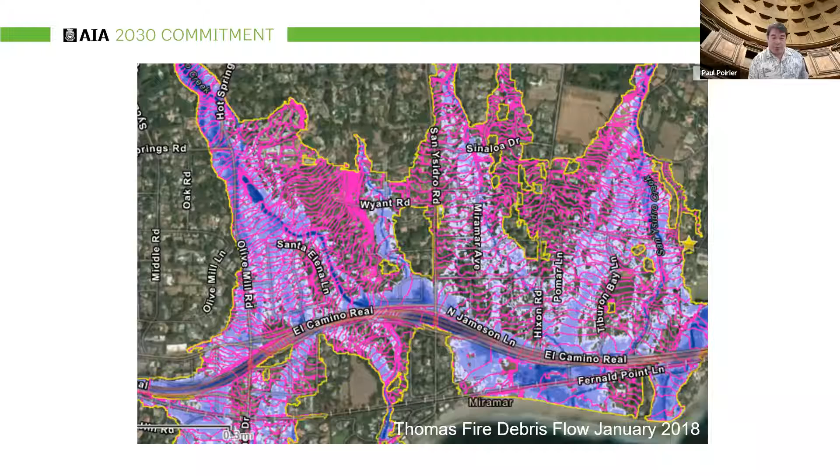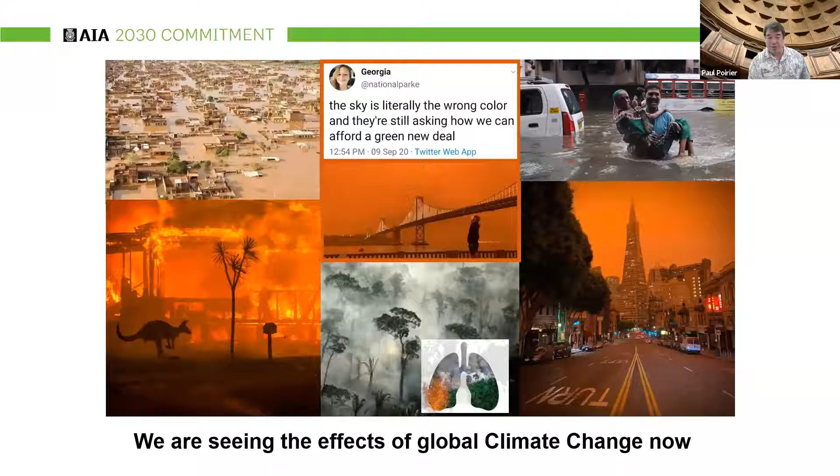All these things are not normal Santa Barbara weather. Globally, we're seeing it from fires in Australia, orange skies in San Francisco and California, flooding in India, and the Amazon as well. I'm glad to see it's not just the United States pushing this forward—through the Paris Climate Accord, a lot of different organizations are trying to work together to come up with solutions, but we need to accelerate innovation and get this stuff put in place ASAP.

Building operations are responsible for 30% of greenhouse gas emissions globally, and buildings generate 40% of annual greenhouse gas emissions, mostly in urban areas. A quarter of the emissions come from embodied carbon—the carbon emitted over the life cycle of the project, including construction and material manufacturing. That's an area the AIA is starting to look into: how much carbon goes into the materials built into the building, as well as how much carbon is generated by the ongoing operation of the building.

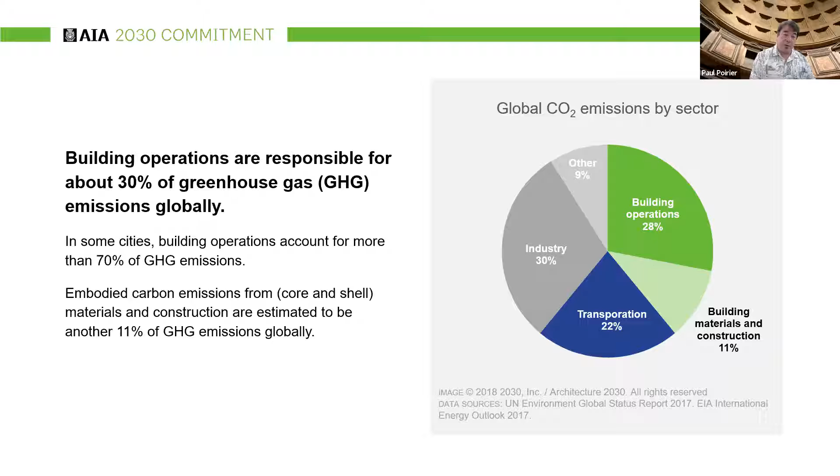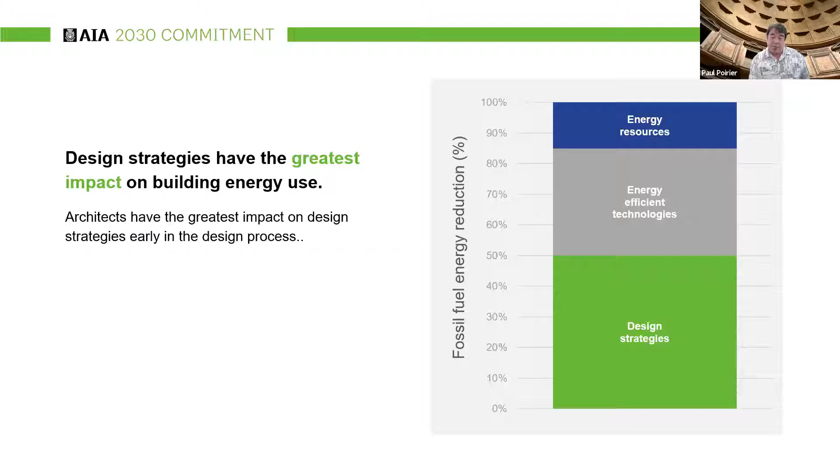Design strategies have the greatest impact on building energy use. Architects have the tools to drive down operational carbon through energy efficiency. So when we make a building that uses less energy, it'll use less energy over the course of that building's life.

The 2030 Challenge was published in 2006. In 2009, the AIA established a 2030 Commitment for firms like me to join, along with AIA COTE members. But in 2019 in Las Vegas, just two years ago, a bunch of us rebels wrote, drafted, and were signatories to a resolution brought by the membership to the convention, and the convention voted to make climate change the top priority of the AIA. Some people on the board of directors took that to heart and really started making programs to promote this on a national level, getting staff and money behind it to push this forward. It's really, really incredible that that has happened.

There are a lot of statistics about climate change. Again, the fight against climate change will play out in our cities and our buildings as we double the current global building stock. Clearly, new buildings need to be built with the type of infrastructure we want for the future, not the type we've been using up till now that may not be the most effective or efficient for fighting climate change.

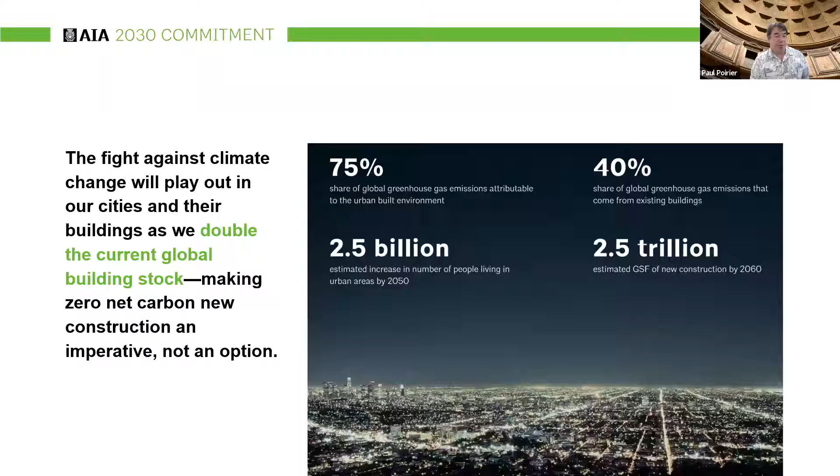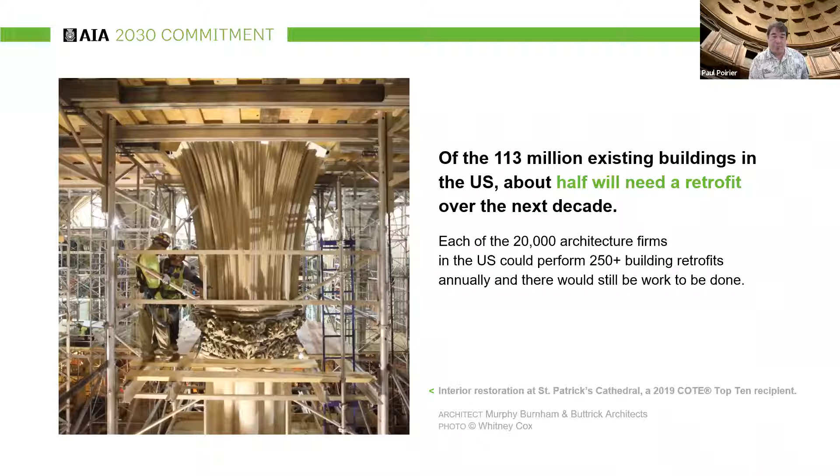Half the building stock will be retrofitted, so retrofits are important. Nobody's really legislating much about the retrofit of existing buildings at this point, but clearly as we're working on buildings, we want to start doing what we can to change them to be way more efficient with lighting technology, HVAC technology, solar technology. All those things are at our fingertips here in California to really make our buildings high performance without much effort.

I won't read the whole quote from Hop Hopkins, the director of strategic partnerships at the Sierra Club, but he says: you can't have climate change without sacrifice zones, you can't have sacrifice zones without disposable people, and you can't have disposable people without racism. Meaning, if we just focus on climate change in wealthy neighborhoods or big, expensive, fancy zero net energy homes, and we don't work on energy efficiency for low-income housing, we're really not going to get where we want to be—we'll be perpetuating the social justice aspect of architecture in terms of healthy places for all income levels, which is what the new goal is. The AIA is embracing that and trying to figure out how to put a metric on it and include it in their design perspectives to show people how it can be accomplished.

So this next section, we're going to talk about what the heck is the 2030 Commitment and what's the process of becoming a signatory.

The mission of the commitment is to transform the practice of architecture in a way that's holistic, firm-wide, project-based, and data-driven. It started in 2010, shooting for a goal of 60% energy reduction from the average energy use. Now it's 2021, so as we're ramping up to 2030, we're trying to meet 80% reduction in carbon use from the national average.

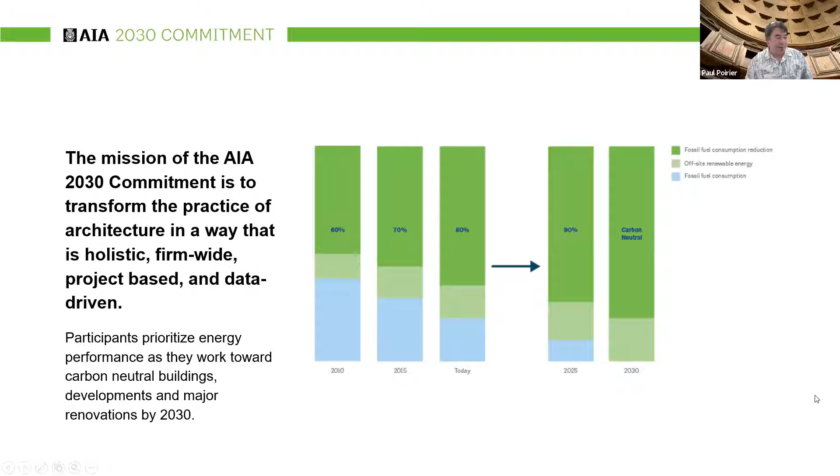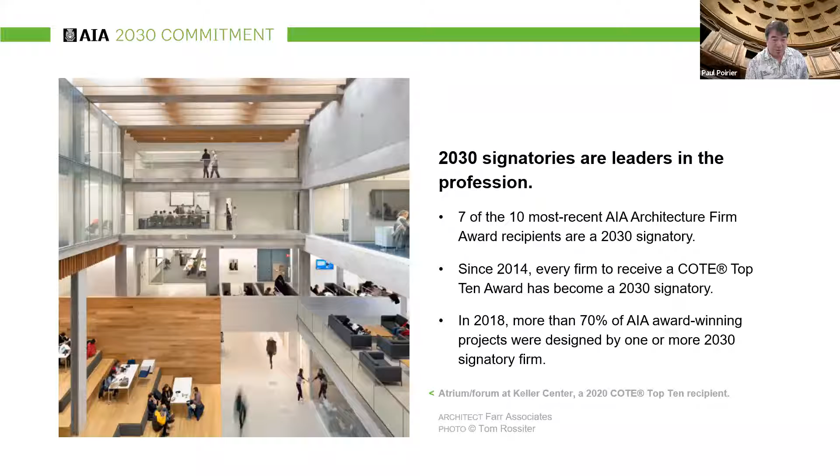So as sustainability starts having more value within the peer-to-peer award process, I think these tools are helping the big firms and leading firms get this information, but it's available to any size firm. So I want to try to get you guys on board with this stuff so that the architects in town can do the best projects we can. And it's not that hard, because I've been doing it.

So these are the steps you need to take to get through the 2030 commitment. Sign the commitment letter. When you sign up online for the AIA 2030 commitment, they'll give you a template letter. You can just copy that, slap it on your letterhead and sign it. You can customize it a little bit. It stays with the record of your firm. It just says, I'm committed to help fight climate change, and I'm going to try to get my firm up to the level that the 2030 commitment says, which is an 80% reduction.

So that's pretty steep, but it doesn't say you're going to. It says you're going to try to, and you're going to move towards that. And I think that's the important part, it's not compliance.

There were only about 27 firms that made it this year, and I was lucky enough to be one of them, just because of the composition of the projects I happened to have in 2019. But it's a commitment to try to do your best.

You create a sustainability action plan for your office. You try to meet the targets. You report all your projects that you did that year, and then you review and update your sustainability plan. You're supposed to do it every 3 or 5 years. That's something I need to do because mine is still from 2010.

So you create an account by going to this login, and you slap the letter on your letterhead, customize it if you feel it's important for people in your firm to maybe add a couple other things about why you want to do it, just to memorialize that. Send it off to the AIA.

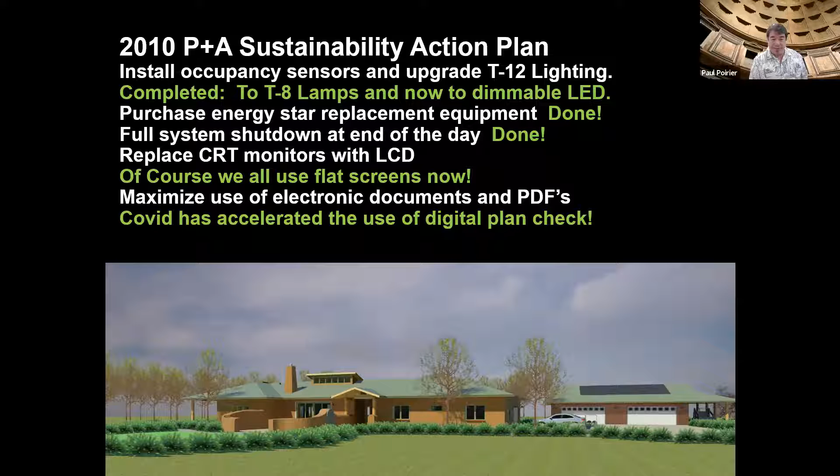Other operational things we did, which are kind of no-brainers now: COVID made us all go to PDF only, we're barely ever running paper these days. And we do have composting at my office, which back when we got it about 8 years ago was quite a feat. Now I think they would probably give anyone composting if they wanted to have it at their office. Usually it's only given to restaurants, but you can request it if you want to in Santa Barbara.

We use all recycled content office supplies, and even recycled toilet paper. We have secure bike storage in our building. And of course, we're using Zoom and Uber and all the things that are part of the COVID world, as well as not renting a car when you travel for business.

So back in 2010, it was really out of the ordinary, but a lot of these things are pretty standard now. So we need to update our SAP, Sustainability Action Plan, for my office and set some new goals because we've almost accomplished all of them.

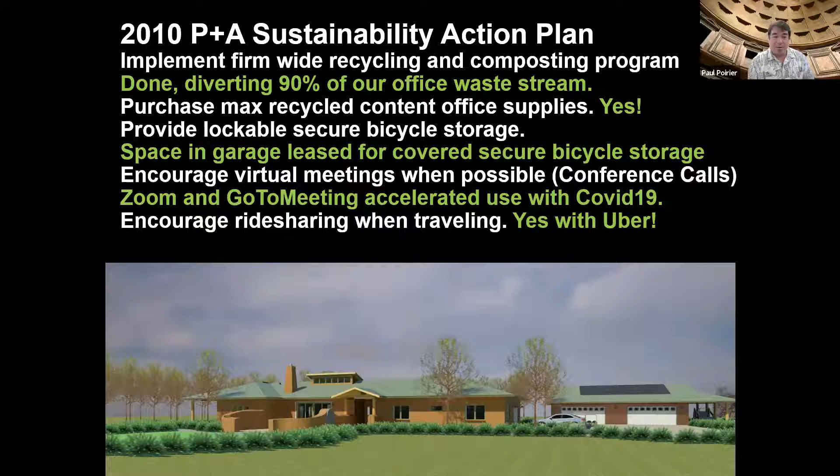Then you want to try to get the 80% projected energy use intensity reduction on your projects. And for projects that are TIs only, I do a lot of those, you only use the lighting power density numbers that come from the energy calcs based on lighting. So it's a 25% reduction from the baseline lighting power density.

With LEDs and in California, you're going to almost sleepwalk to that one, unless you like having tons of lights everywhere.

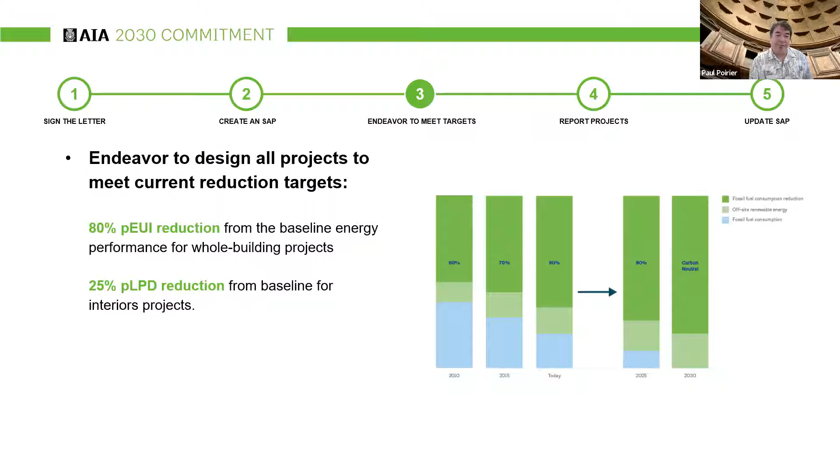The deadline's March 31st every year, where you have to input the data from your different projects. So depending on how many projects you run that have applicable data, my office runs about 35 that have energy data.

Other ones are trash enclosures and grease interceptors and stuff like that that I do not put into the DDX. But anything with lighting, interior conditioned space, or new projects, we put them all in and record the square footage and the energy performance. If you're working with another firm, you can share the project and both firms can report that.

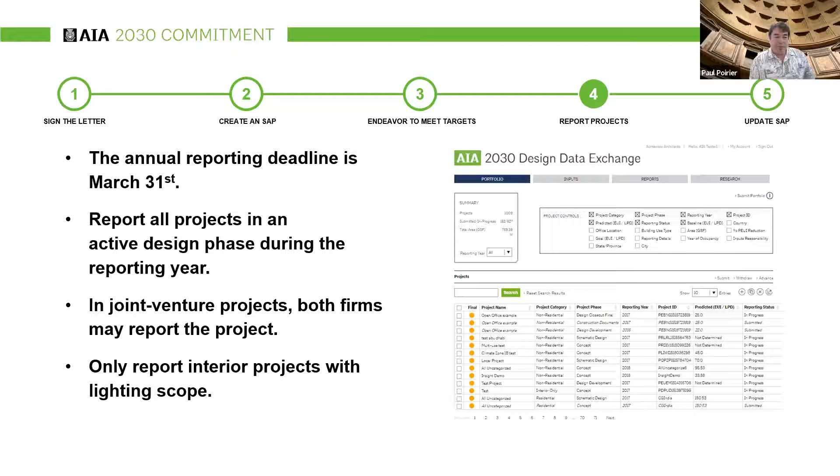Update your sustainability action plan. Here they're saying every 3 years, so that's something I need to do. And then what impact are these signatories having?

If we can get 10 more people from Santa Barbara we'll be big on this map. They'll go, wow, we got all these sustainable people in Santa Barbara. It's the epicenter of green building. And it's simple to do. So that's my goal, is to make us and California stand out. When this project is dominated by Californians, they're going to go, what are they doing over there? And we're going to go, we're building zero net energy homes that have renewables on every roof.

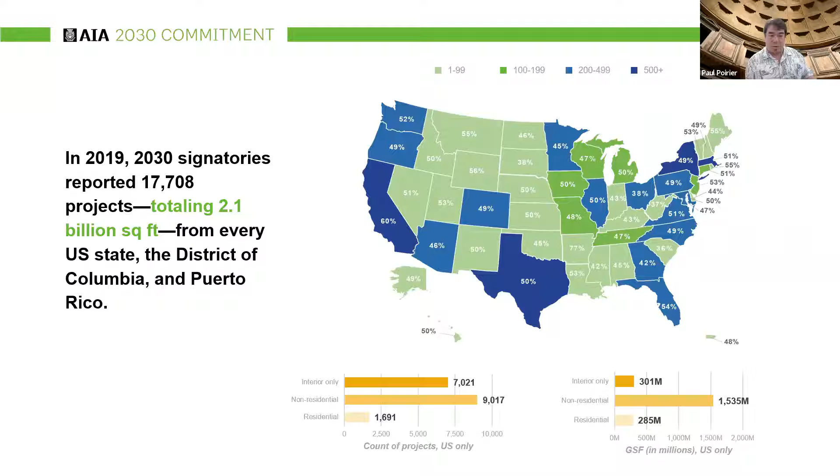And then worldwide, actually there's 2,602 projects all over the world. A lot of these large firms do stuff globally, so the program is actually running globally. So imagine comparing a project that we're doing in Santa Barbara with one that's done in China where there's no energy code. So of course we're going to have a big head start because we're already going to be 50%.

I don't know if that's true anymore with the new code and the new baseline, but we might be 40% above baseline just by complying with Title 24, as opposed to a place that didn't even have an ASHRAE baseline, where you could just do whatever. You could set a building on fire to heat it if you wanted to, and it's probably legal over there.

I think that California is the place that's the most regulated and has the highest standards and maybe the highest aspirations of any state. And Santa Barbara is the mildest climate zone in California. So clearly we should be able to kill this thing and have the highest performing projects.

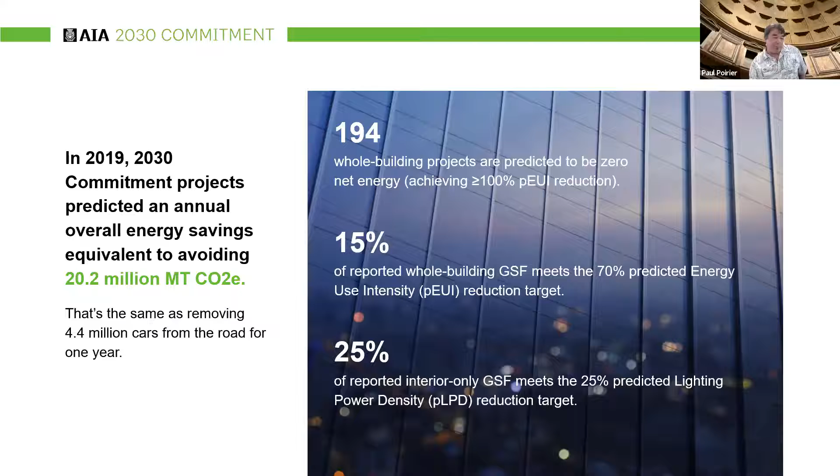So the impact of people participating, it's just measuring stuff people are doing, but it's equivalent of removing 4.4 million cars from the road for 1 year. But I don't know if people would be doing it that well without the tool, is the point. It's nice to have metrics where we can measure.

Say your office is running at 30% better than baseline, and you know you want to be at 70, but maybe that's too much of a stretch for the project. You could say, well, let's push it to 40 and try to get it up to 40, and get a bunch of projects up to 40 or up to 35, so that every year you make a little baby step closer to where everyone's trying to get to.

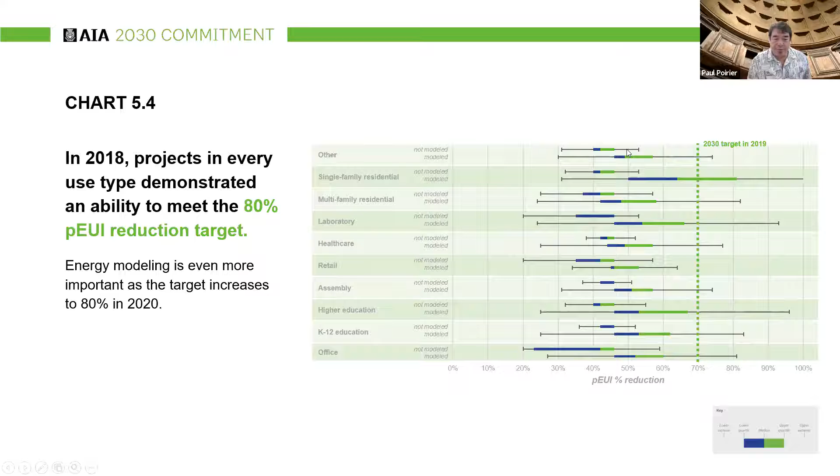Okay, I'm going to have to really start going faster. Model projects, of course, perform better than non-modeled projects. Lots of savings of money for both commercial and residential projects when they're more energy efficient. That goes without saying.

It's easy to make an argument to your clients that energy efficient, high performing schools will save them money in the long run. They get it. This is how our progress has been of the firms participating versus where we're supposed to be on average. And we're not there yet, so we've got to get some others.

California was at 60%, which is up here. We're closer, but we're not quite there. So in California, we're going to make a big push to educate people about this and get our projects better so we can push up to the 80 line, which is right here, which we just stepped up to in 2020.

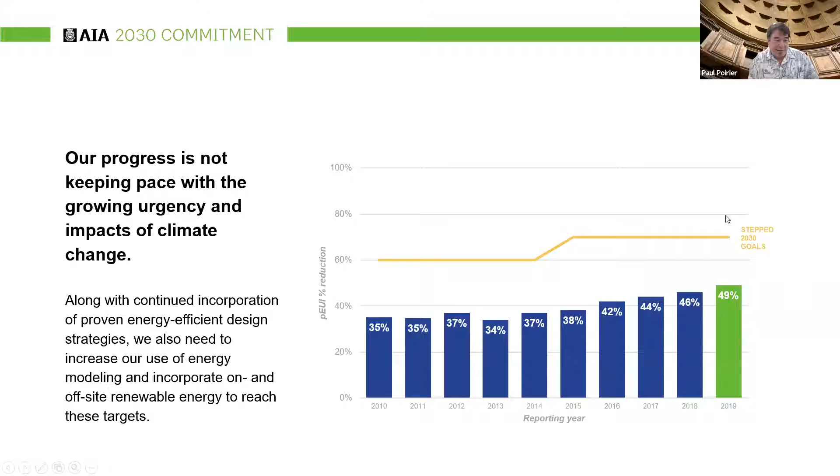Okay, I'm going to show you super quick a demo of what the DDX app looks like by going into my confidential file here. So this is a house we're working on, and we've already input all the data about it — where it's at, what the climate zone is, what the square footage is, what code was going to be in effect.

We run the Title 24 energy model. If we don't hit the target, we're going to crank some more insulation on something or make some adjustments with my energy consultants to get it to where it wants to be so I can end up having better performance. Let me show you this other tool.

So everyone might be saying, how do you input this EUI? Are you a genius? Do you use Sefaira or one of those programs to generate that stuff? Actually it got a little cumbersome with the 2013 Title 24, so I emailed, or Tara emailed you guys, these calculators.

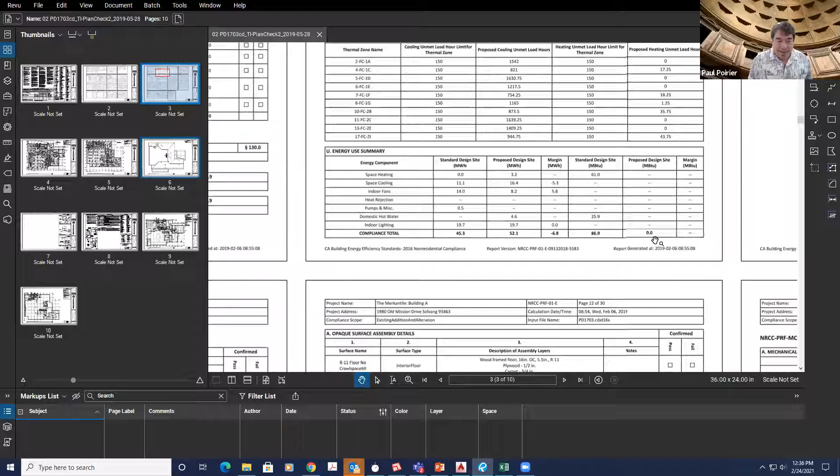So my numbers are 52.1 for electric, 0 for gas. I go over here to this table calculator that's in your kit, and I put the square footage in. I take the 52.1 from this Table U, and the 0 for gas use from Table U, and I put it in the calculator. Boom, boom — it converts it to common units.

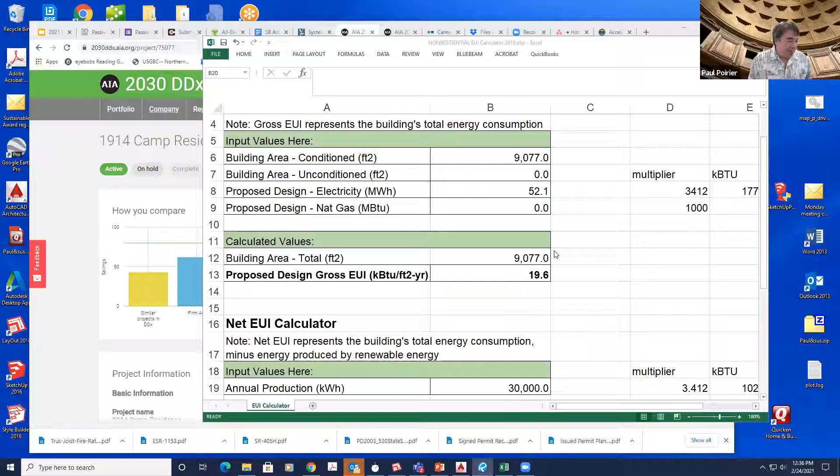This used to be brain damage for me. It converts it to a common energy unit. I can just come over here and it says, okay, you're using 19.6 kBTUs per square foot per year.

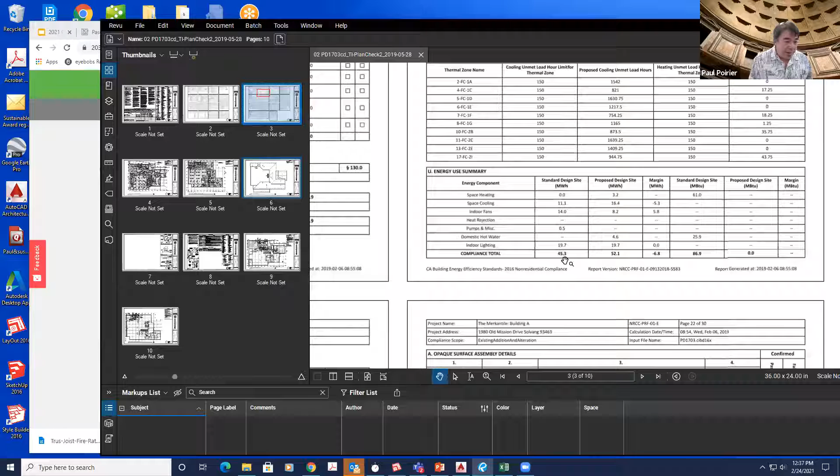And then, yeah, we're working with Brighton Solar to put a 30,000 kilowatt-hour solar on the roof, and it gets me down to 8.3, which is my predicted energy use intensity, PEUI. And from this, my baseline EUI, I believe, was this number plus that number, right?

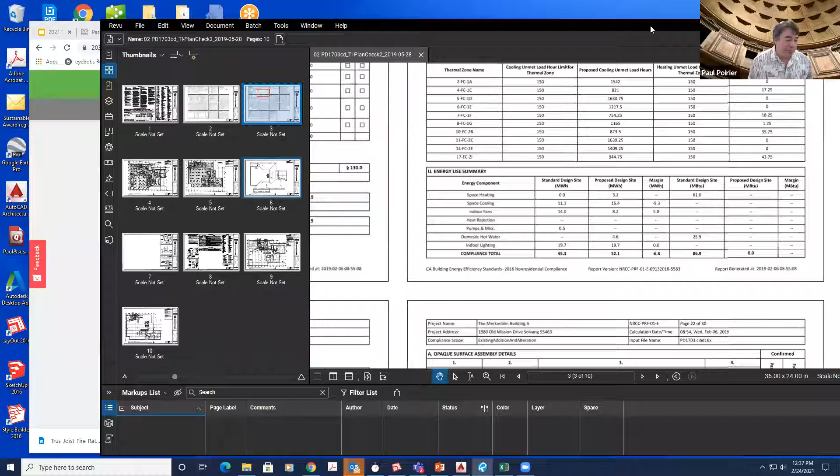Of the gas plus electric, so we're killing it, which is awesome. So I put this into the DDX as my energy use for that project, and then it tells me how good I did, right?

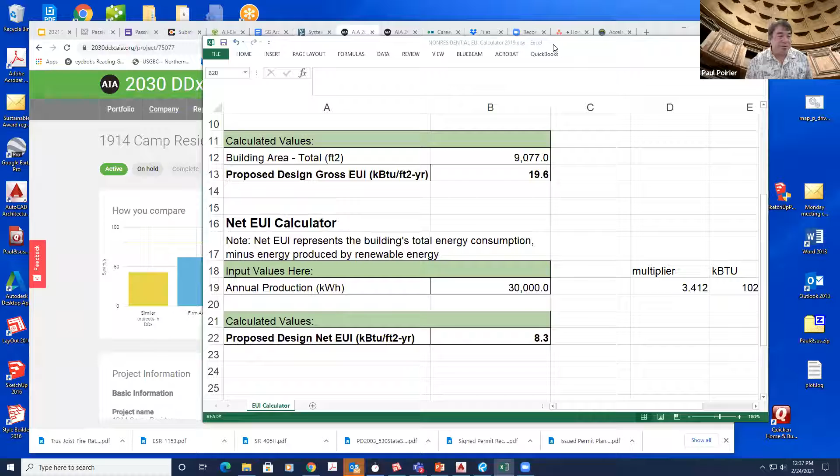It takes me about... my employees who are just recent graduates, not too sophisticated on the architecture business or reading Title 24 calculations, can do this in 15 minutes. Square footage, use, applicable code, teach them how to use the calculator and find the data in table U. There's instructions I emailed you on how to extract that data from the 2013, 2016, and 2019 energy codes for residential and commercial.

So you now have the instructions and the magic tool. I love this tool. Why? Because say my solar guy goes, oh yeah, we could put 30, but how much do you really want to have? And I can go, oh, let's try 35... nah, not enough, try 45... oh yeah, that's looking really good. So I can size my solar system to get to zero fairly easily. This all comes with a different cost, right?

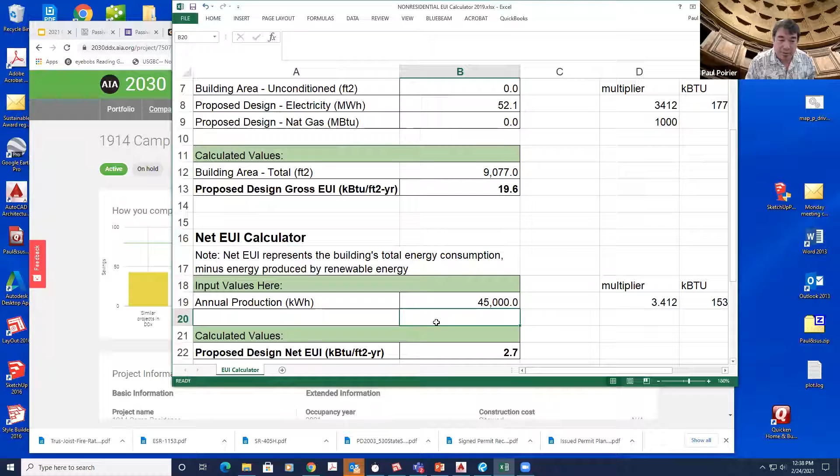You can balance the cost of the budget that the client has with the goal of the energy use intensity and the roof area or other ground area you have for your solar system. So instead of having everyone else in control of that stuff, you can now own it as the architect who knows how this stuff is working, right?

Okay, going back. So now that's the DDX, purely about energy use. So then the AIA met with COTE, everyone brainstormed, how do we get architects to do buildings that are gonna just make a better world in general? And not just fight climate change, but equity and all these other issues. So they took these things that they used to judge projects for the COTE Top 10 Awards...

...and they made this thing called the Framework for Design Excellence. They've embraced it. They're gonna try to get everybody educated about this that's a member of the AIA. We're gonna alienate a lot of people who could care less about any of this stuff, but that's the decision that they have made, is that we're all in on this, and we're all in on design excellence that's defined by this. And we're gonna give awards based on this as well.

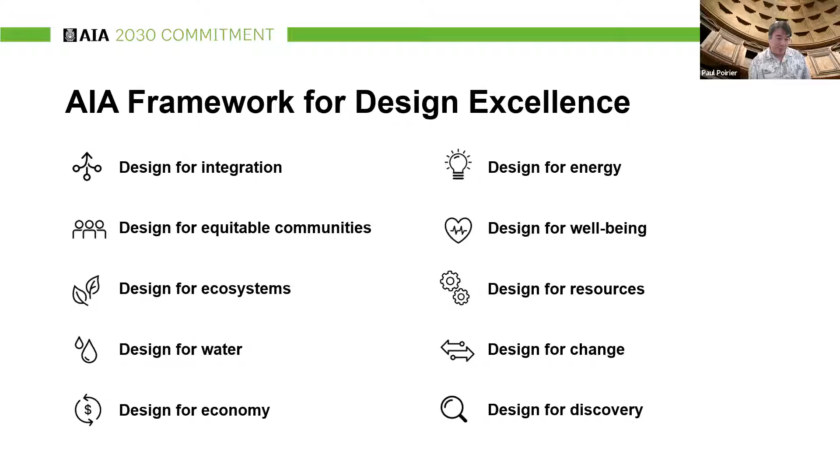So there's some documents I sent you. It's on the AIA website if you really want to jump into this deep. Each tile includes a description of the principle and the focus topics. You can go through it, but I'll briefly talk about the 10 concepts just so you get an idea of what they are and what resources are available.

So the big idea behind the project and how the approach towards sustainability informed the design, that's what this design for integration is about. You describe the project, the program, unique challenges and opportunities, how the design shaped around the project's goals and performance criteria. They have all these different programs that they're doing at National that you can dive into and just go deep.

Design for equitable communities. Also, sustainability is inextricably tied to the wellness of communities. How do community members inside and outside the building benefit from the project? Were community members engaged during the design and development process? Did you have public meetings to try to make the project better, really, is what they're talking about. Other resources the AIA is developing around this context.

This is kind of like what we did with the State Street Design Charrette. How do we make the community better? Architects giving input. Maybe you have a project you want to try to interface with how it's relating to that framework we came up with.

Design for ecosystems, kind of obvious. Sustainable design protects and benefits natural ecosystems and habitat in the presence of human development. Design for water, also fairly obvious because we've been doing this for a while. Conserving and improving the quality of water as a precious resource. Some resources being developed around that.

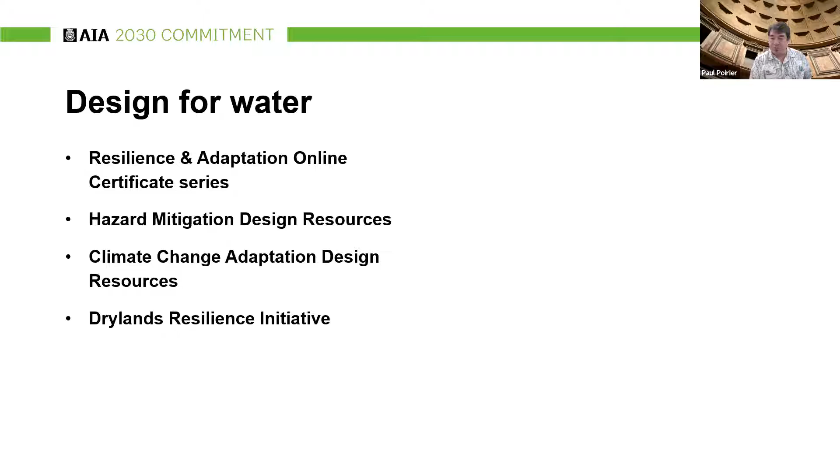Design for economy. This is providing abundance while living within our means as a fundamental challenge of sustainability. Is it affordable? How are materials used? Is it resilient?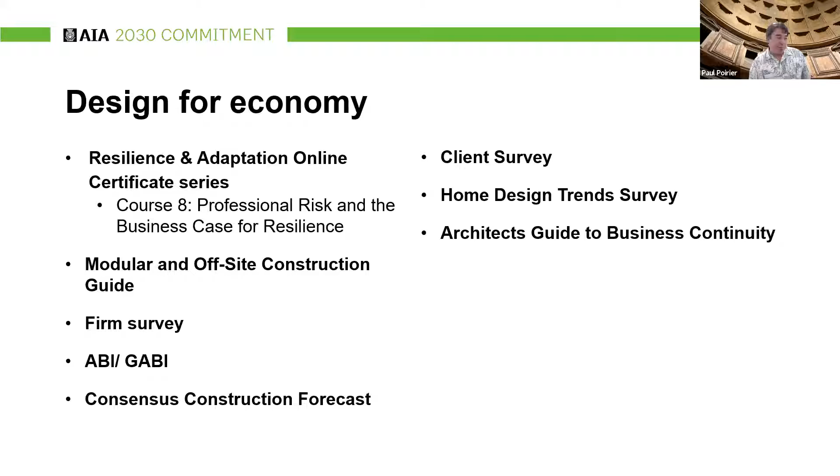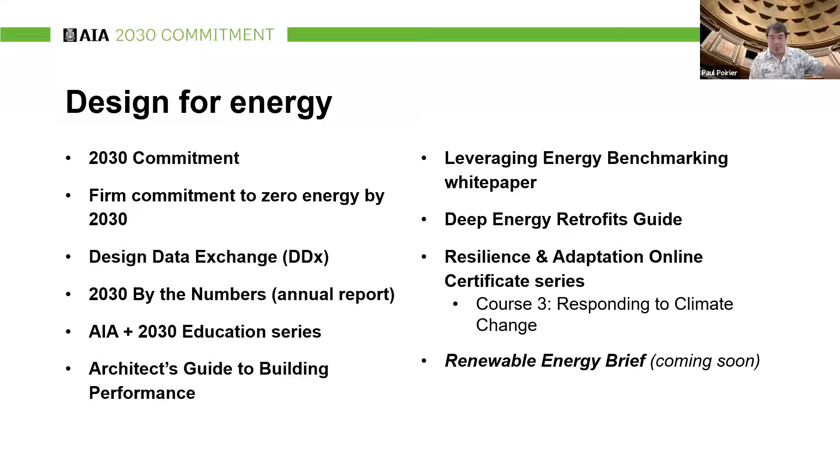So other sorts of things that are related, and resources that are available from AIA related to this principle. Design for energy, pretty much the PEUI stuff we just talked about, the DDX and the 2030 commitment leading this area of work.

Design for well-being. Sustainable design supports comfort, health, and wellness for the people who inhabit or visit buildings. What are the strategies for using daylight, indoor air quality, connections to the outdoors, thermal, visual, and acoustic comfort for occupants and others inside the building? It's that whole wellness effort, and other things the AIA is using as resources for that.

It's overwhelming, I know. Design for resources: informed selection of materials and products to reduce life cycle environmental impacts while enhancing building performance. Resources for that - this is going to start getting standardized by UL and some of the other efforts out there, to find materials of concern and things like that.

Healthier materials protocol. Design for change - this is reuse, adaptability, and resilience, essential to sustainable design, which seeks to maintain and enhance usability, functionality, and value over time. So is the building going to be there and be able to be adapted, or is it an adapted building?

Design for discovery. Sustainable design strategies and best practices evolve over time through documented performance and shared knowledge of lessons learned. So they're trying to extract data from successful projects and make places and buildings a place to learn about and push innovation forward. The DDX does that by posting your stuff online. There's a project called BRIK, the Building Research Information Knowledge base - it's research data on the built environment, materials and strategies, some things about aging.

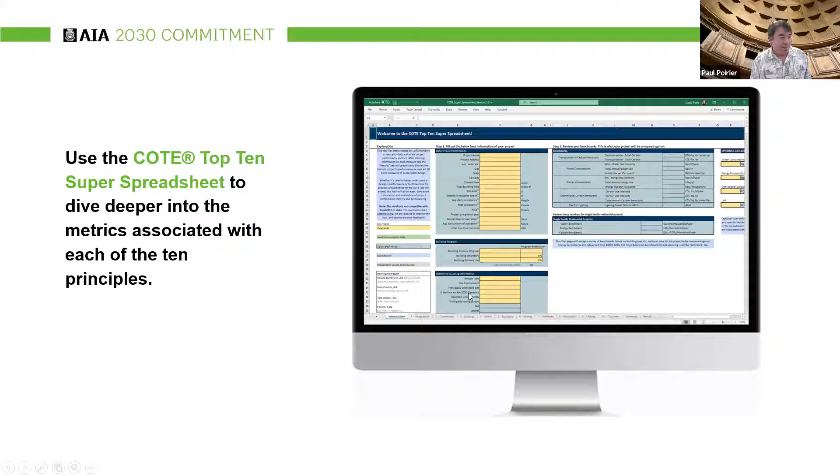So I did include that in the stuff that you got emailed. The super spreadsheet should be in there, and that's what that Excel spreadsheet is all about.

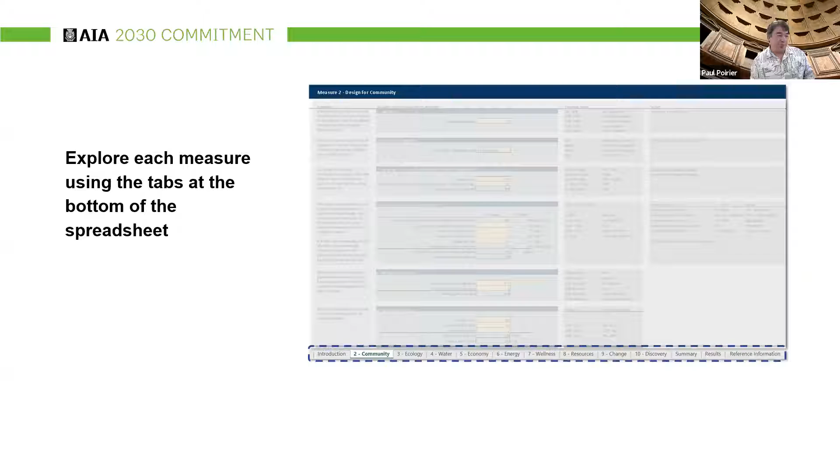So super spreadsheet. Now the Common App, let me talk about this for a few minutes. So to go with the super spreadsheet and the 10 principles, they made the Common App for Design Excellence, and it's a way to do a Reader's Digest version of how your project performs in relation to those 10 topics.

So they wanted to align the awards program to support the values of the Institute embraced by this thing called the Big Move, moving towards sustainability, to simplify the process, because every award submittal has a different set of criteria. So they're trying to standardize it across the Institute so that local, state, and national awards will use the same application. So if you filled out a form for a local award, you just submit it to national and state, and no more material would be needed.

And to collect, track, and make available to the membership consistent measuring of the data related to the award-winning projects. So they have the spreadsheet. It's cool, I'll show you that in a little bit. So, lessons learned.

When we first started doing this, me and my engineers were working for compliance. We worked till we got past Title 24, we're permittable, and we stopped. And then later I said, hey man, what's the performance on that straw bale house we did in Santa Ynez? It's like using solar to heat the slab, has hot water, and every whistle we could think of. And they go, oh, that thing, it's like 25% better than code. I'm like, what? I go, really, did you model it?

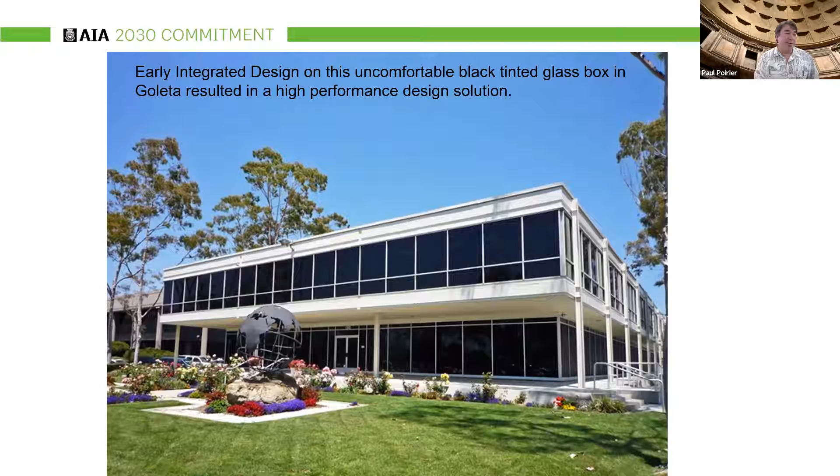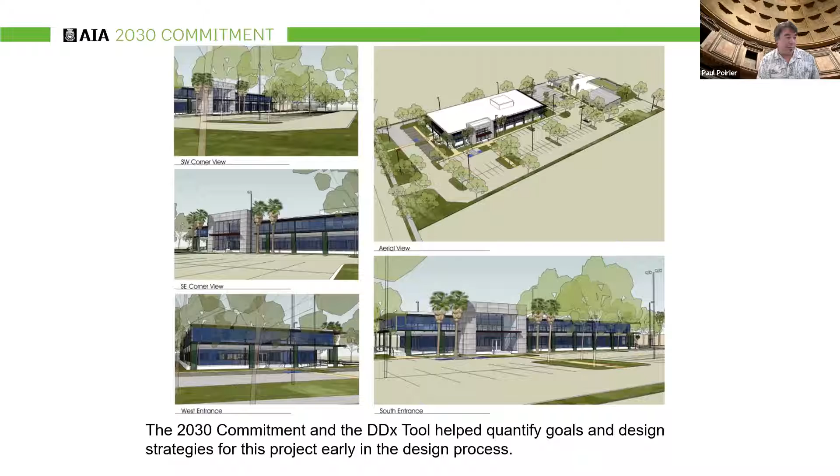This is a project out in Goleta we're working on with Design Arc. They're doing the insides, we're doing the outsides, but Integrated Design came up with a solution where we're shading all this black glass, replaced the storefront with dual glazed Solarban 60, and shaded all the glass with solar panels. This one's super cool, under construction right now on Robin Hill Road in Goleta. We'll do a walkthrough on that at some point.

Also, a common question is, how much extra do you charge for this incredible design? My question back is, how much do you charge to design a beautiful building? Do you strive to just design it beautiful enough for you to get paid for your work, or do you strive to make it as beautiful as you can?

I think the same attitude has to go to building performance. Don't design the lowest performing building allowed by law, which is stopping once you cross the finish line, but design the best building you can within the budget you have, because it's going to pay benefits to the client in terms of money.

Advocacy - we're advocating here for all electric buildings. We're in the hot of it right now in Santa Barbara, trying to eliminate fossil fuels from the building sector. Looks like Santa Barbara will probably pass that ordinance for new buildings to be zero net fossil fuel.

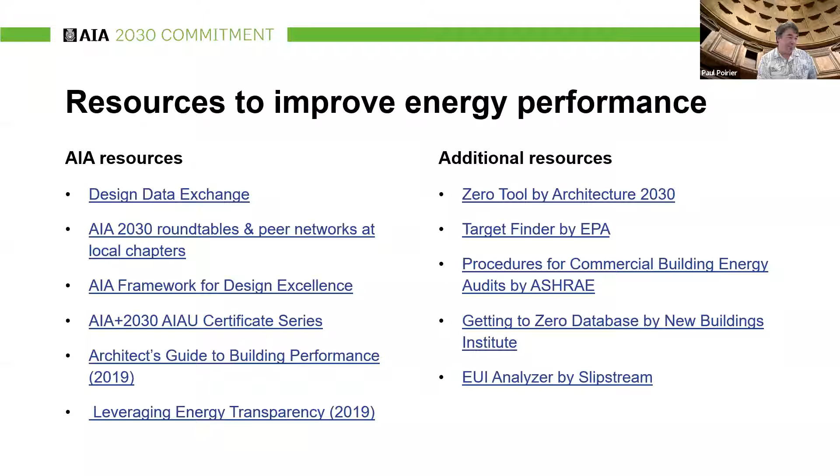And then resources available from the AIA - they have all these things. We'll get you the PowerPoint so you can see this stuff and reference it. They have guides, they have annual reports for people providing how they did on the 2030 commitment. It's really the buzz, it's happening. Before we have questions, let me just show you the Common App real quick.

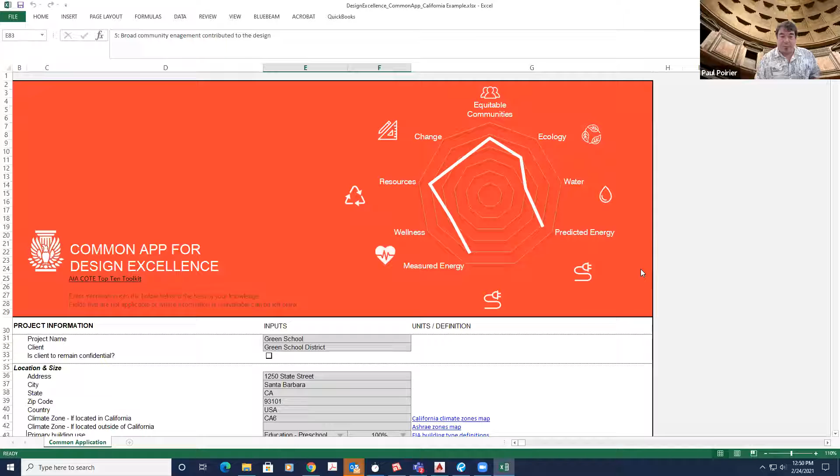It's pretty cool. You just put the description of the project, type in the address. Some of these things are hyperlinked. They all report back to the model up at the top. You add some descriptions in here for design for integration.

Design for equitable communities - right now it's really looking at what your walk score is. If you click this, it takes you to a link to a website where you just put the address in, and it gives you these 3 values. It tells you whether you're close to transit, bikeable, and walkable automatically. So it's really a place to store all the information about your project's performance in relationship to those 10 items.

It gets submitted as part of your submittal for the design awards, this single document along with pictures. I judged 2 of these this year and learned a lot about this form, but it's pretty cool. Down at the end, they start looking at post-occupancy evaluations - what's the lifespan of the building going to be, how much embodied carbon is in the materials selected.

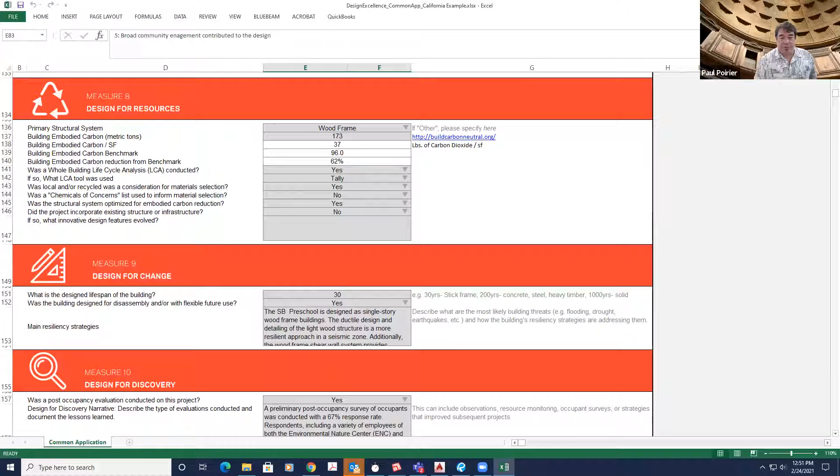This one is something I need to learn more about myself, Design for Resources, which is kind of the cutting edge in terms of architecture and research happening right now. So with that, I think I've given you enough. I could probably talk about an hour about each one of those, but I think I want to take some of your questions. So I'm going to stop sharing and see if anyone has any.

So we actually have, so far there's 3 questions in the chat.

The first question was, can you explain how 2030 incorporates or takes into consideration on-site renewable energy? And does on-site renewable energy impact your PEUI?

Yes. So I showed you on that calculator how you can take the gas use, electric use, and on-site renewables, plug them right in there, tweak them however you want, and that definitely affects your PEUI. It's part of the design of how you're getting to compliance.

Taking all the gas out of the building is going to jack up your electrical load. Even if your lighting and systems are really efficient, you're taking all the natural gas heat for hot water and space heating and dumping it onto electric. But then you can offset that with renewables, which will pay for itself in 7 or 8 years. So not only is the project going to be a little less to run, but it's then free to run after the solar panels are paid for, because it just offsets the cost of the utility.